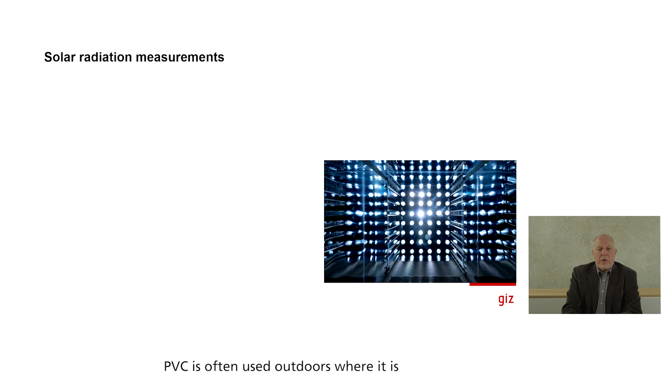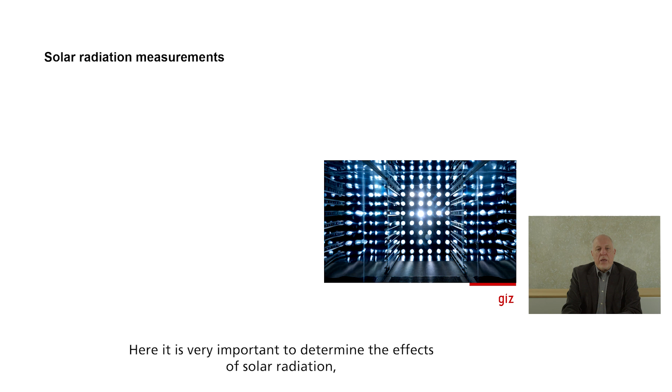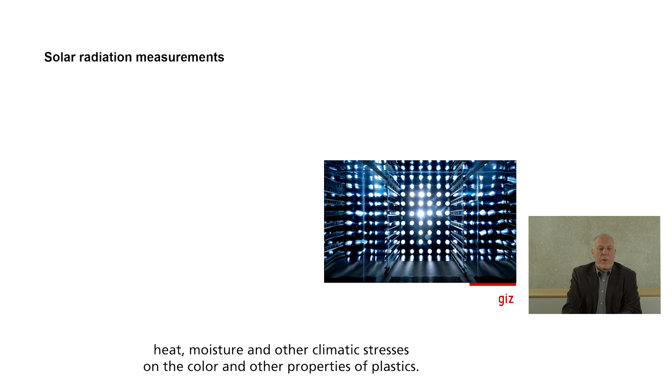PVC is often used outdoors where it is exposed to solar radiation, for example as profiles for windows. Here it is very important to determine the effects of solar radiation, heat, moisture and other climatic stresses on the color and other properties of plastics. In Europe, outdoor exposure to solar radiation is regulated by the standard ISO 877.

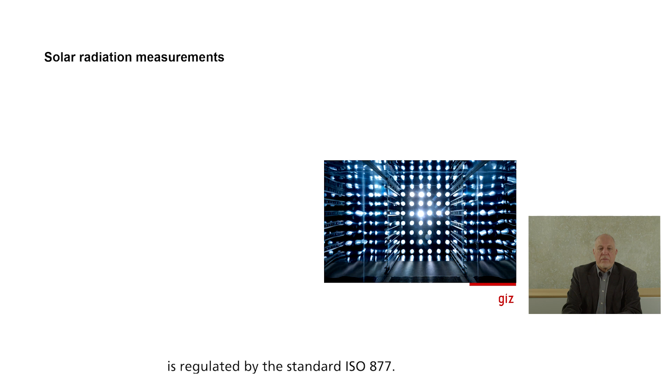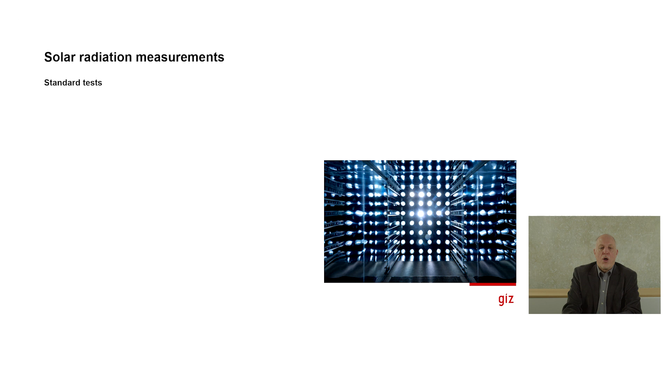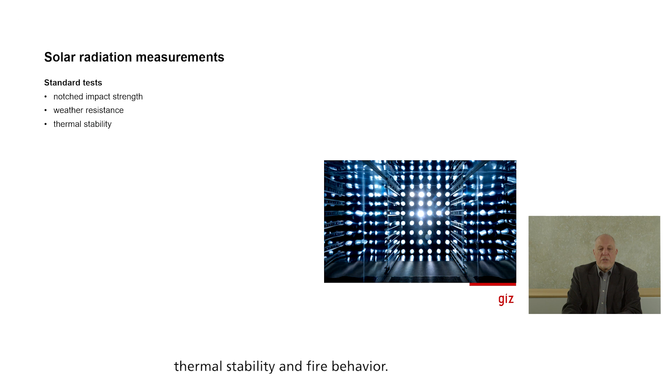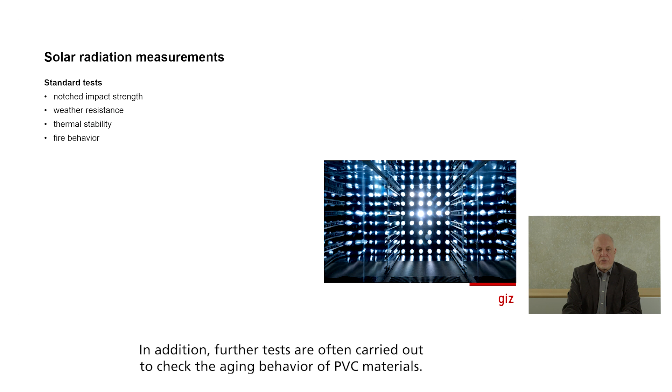Typically, the following tests have to be performed to assess the durability of PVC parts: notched impact strength, weather fastness and weather resistance, thermal stability and fire behavior. In addition, further tests are often carried out to check the aging behavior of PVC materials, and here two methods are usually used.

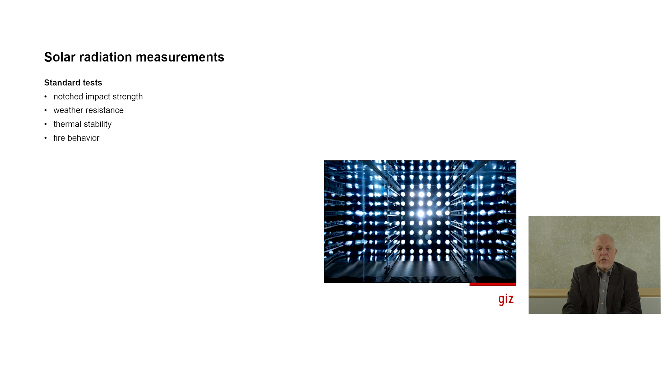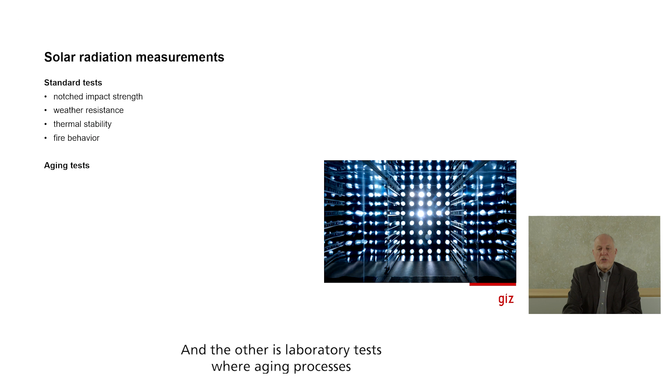One method is outdoor tests in which the materials are exposed to actual weathering, and the other is laboratory tests where aging processes can be artificially accelerated. We will now discuss these two options in more detail.

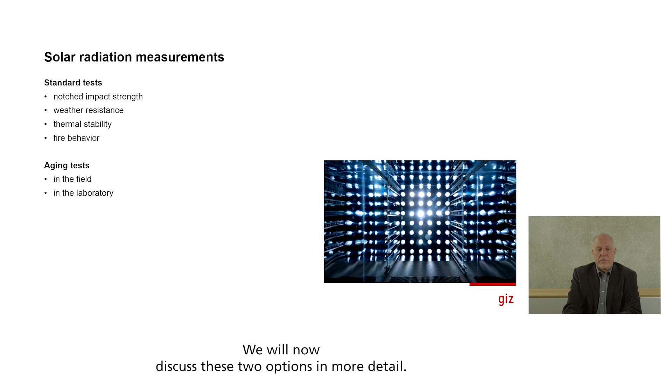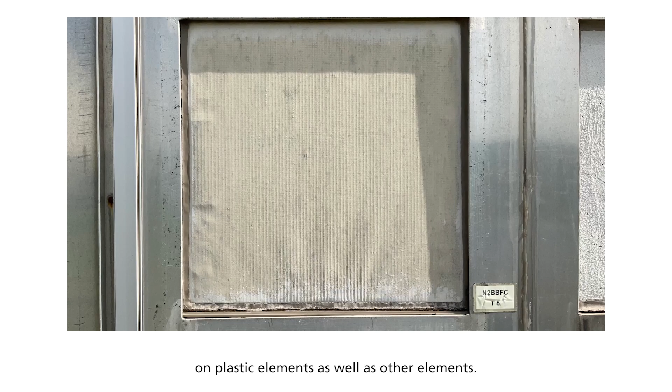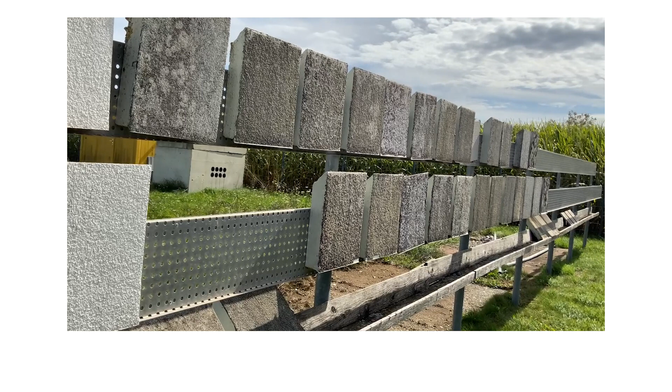Here you can see how we carry out tests in our free field test site on multiple facade elements, for example on plastic elements as well as other elements. The samples are usually exposed to the weather for several years. This is particularly demanding for materials at the Institute's location in southern Germany.

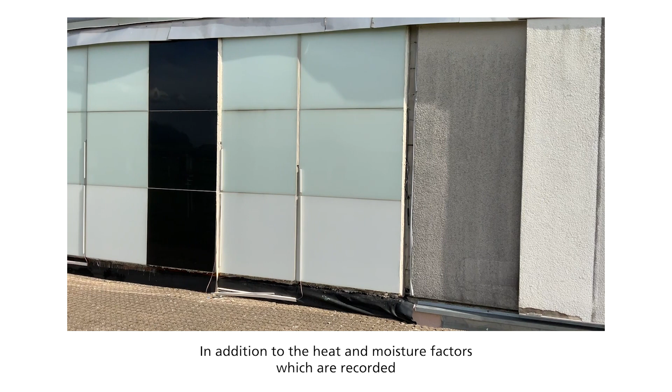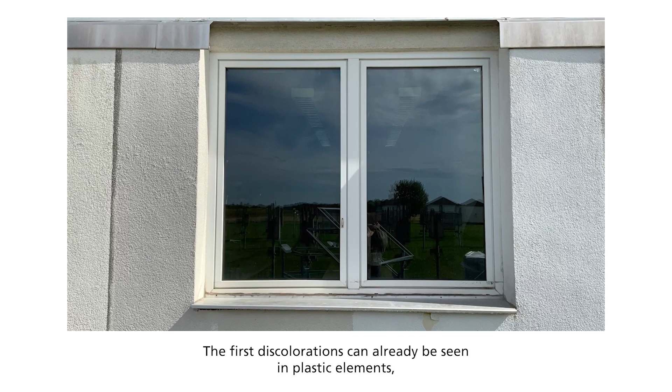In addition to the heat and moisture factors, which are recorded across the cross-section of the component, the visual material changes are also examined. The first discolorations can already be seen in plastic elements, and these are expected to intensify over the next few years.

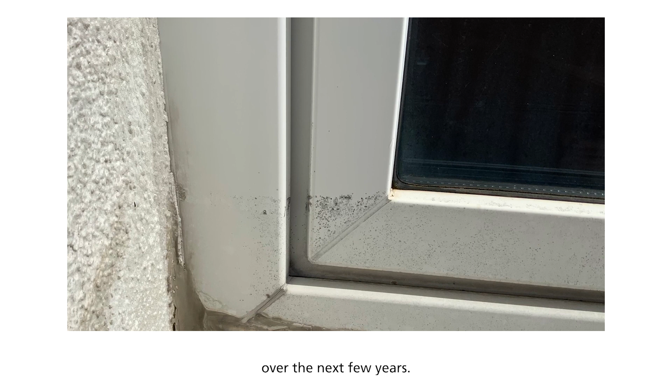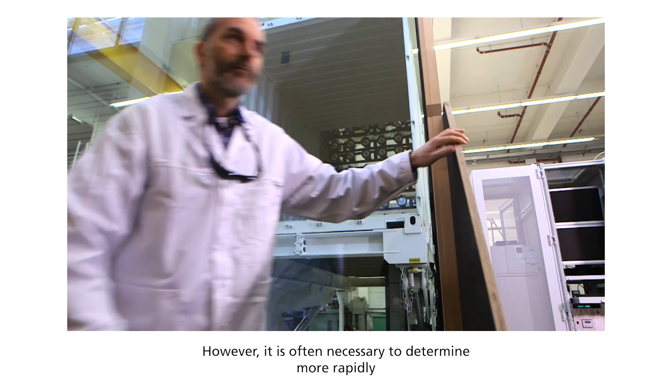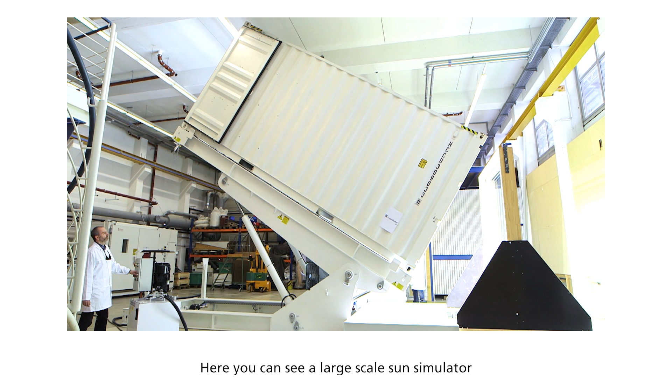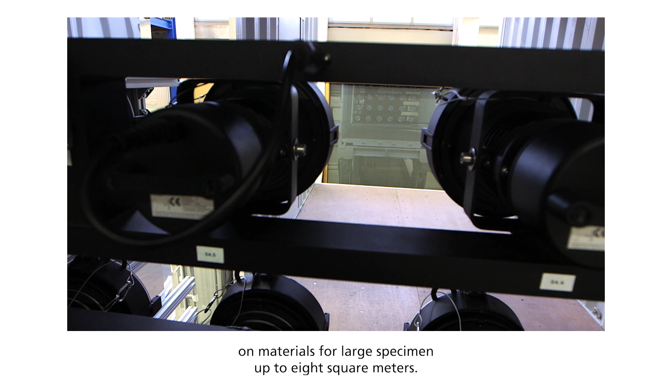However, it is often necessary to determine more rapidly the effects of radiation, heat and moisture on the physical, chemical and optical properties of plastics with artificial accelerated weathering or artificially accelerated irradiation exposures that use specific laboratory light sources. Here you can see a large-scale sun simulator that we use in our institute to evaluate the effect of solar radiation on materials for large specimens up to 8 square meters.

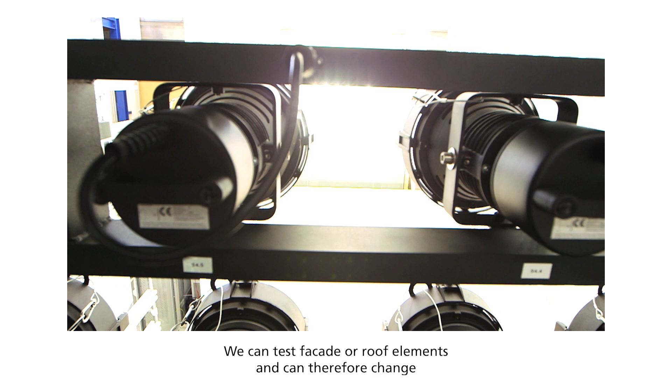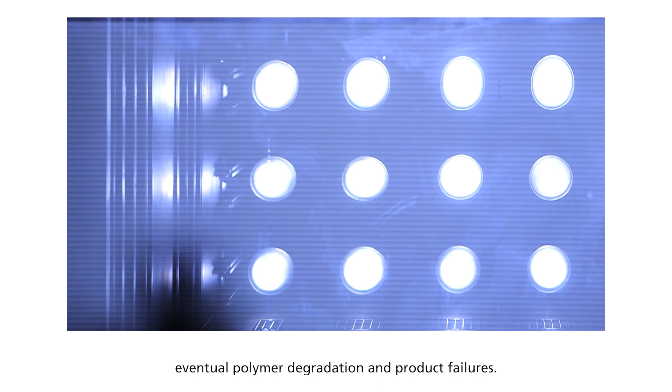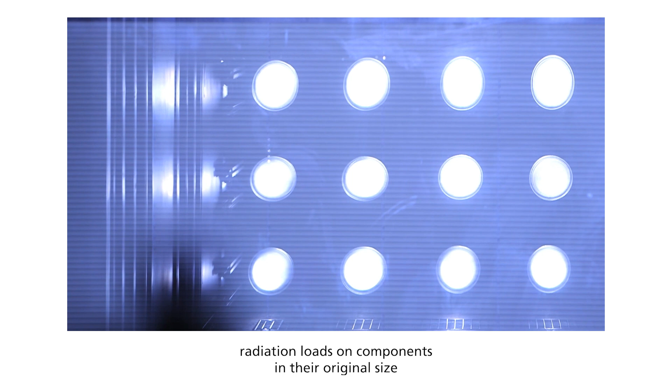We can test facade or roof elements and can therefore change the angle of the sun simulator from 0 to 90 degrees. Exposures in laboratories with devices like this are conducted under more controlled conditions than found in natural environments and are intended to accelerate eventual polymer degradation and product failures. It enables the reproduction of almost all occurring radiation loads on components in their original size and installation position.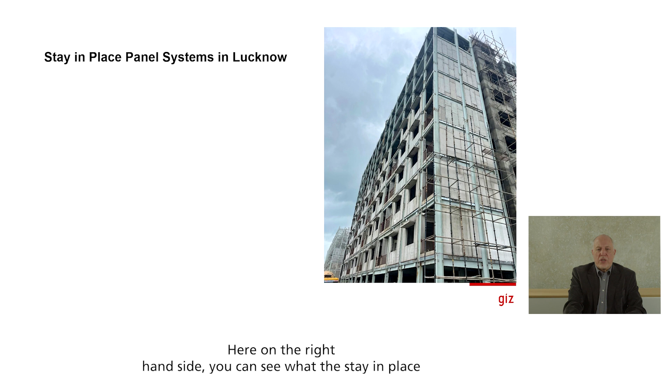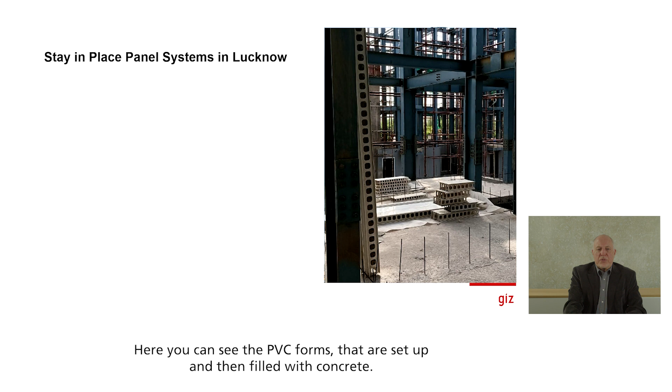Let's now move to our lighthouse project in Lucknow. Here on the right hand side you can see what the stay-in-place formwork system looks like, which is used in Lucknow. Here you can see the PVC forms that are set up and then filled with concrete. What conditions does the structure have to withstand permanently?

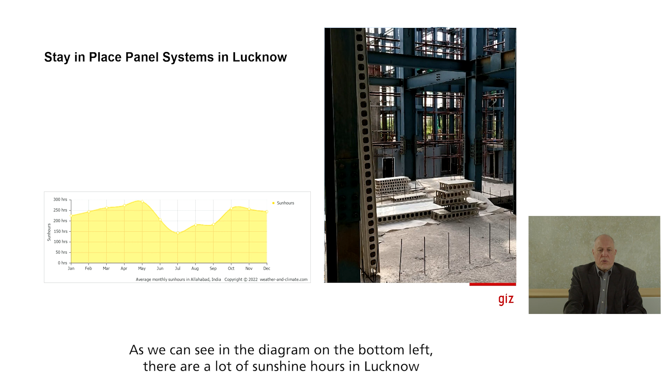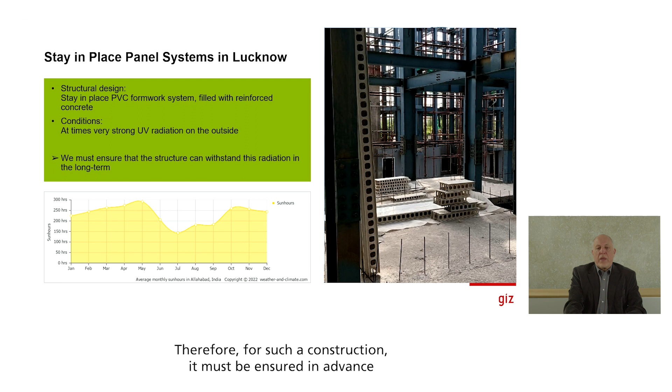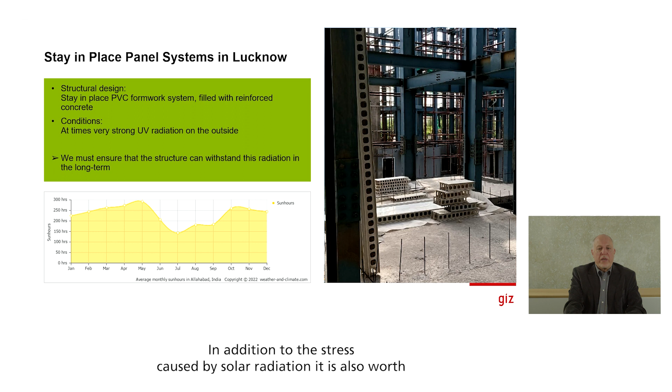As we can see in the diagram on the bottom left, there are a lot of sunshine hours in Lucknow and the UV radiation is very high throughout the year, stressing the material. Therefore, for such a construction, it must be ensured in advance that the material can handle the stress permanently. In addition to the stress caused by solar radiation, it is also worth taking a closer look at the moisture processes that take place in this construction.

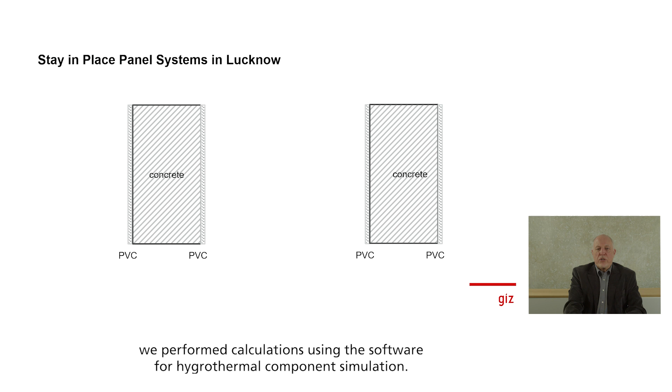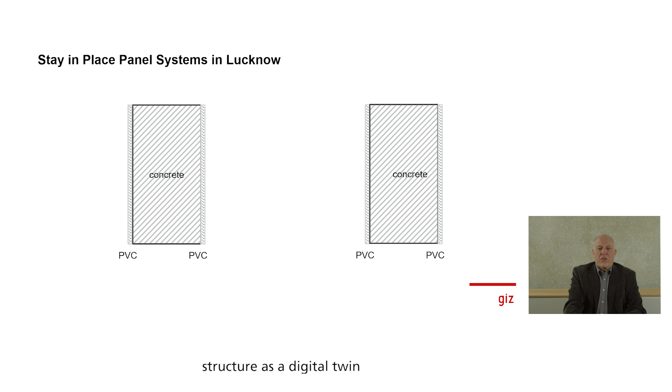For this purpose, we performed calculations using software for hygrothermal component simulation. We specifically mapped the construction structure as a digital twin, as it is currently executed in Lucknow, and used realistic climatic conditions as framework conditions.

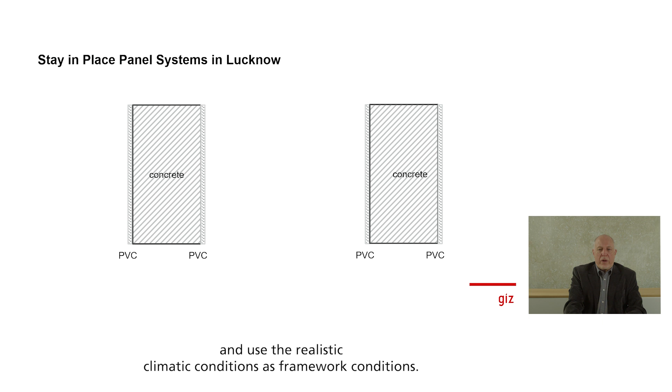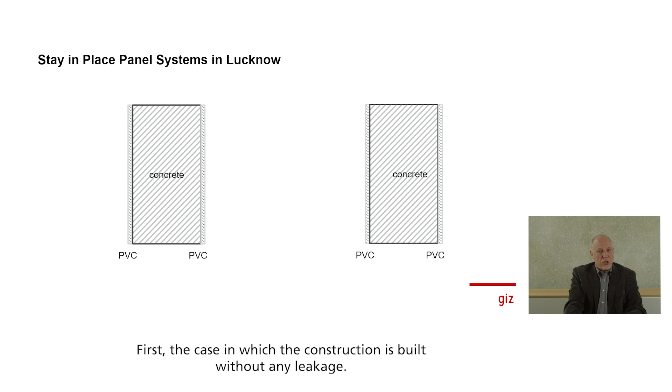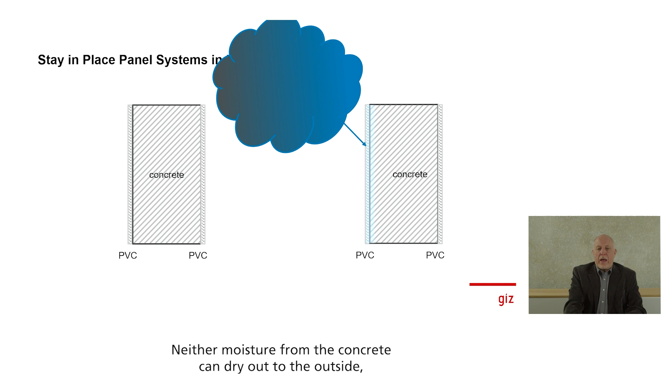We calculated two different variants. First, the case in which the construction is built without any leakage, meaning the PVC layer is completely impermeable to water. Neither moisture from the concrete can dry out to the outside, nor can water from precipitation get into the construction.

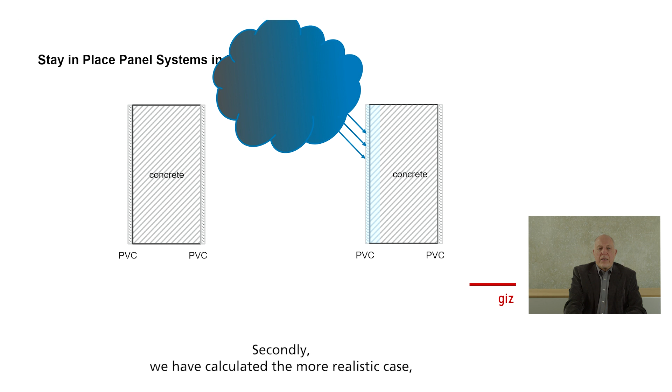Secondly, we calculated the more realistic case: a construction with the same structure, but where the PVC layer has some leakages through which moisture exchange can take place.

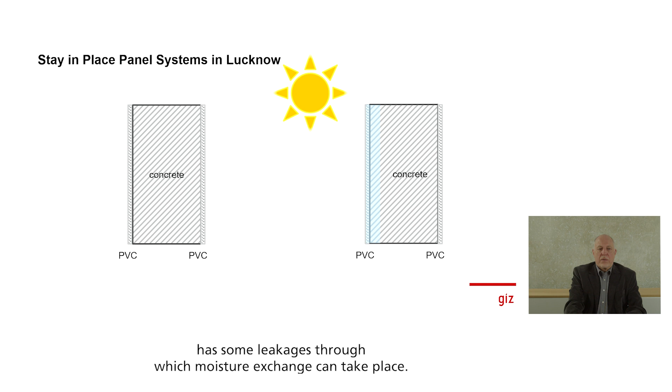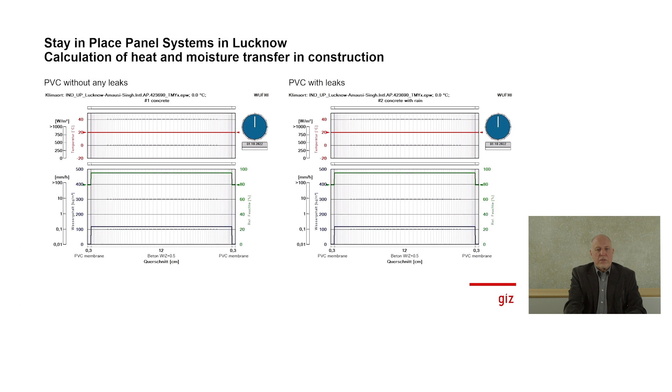Now let's take a look at the results of our calculation together. We calculated for both versions how the heat and moisture in the construction will behave over the next 40 years. On the left-hand side you see the version without leaks, on the right with leaks.

If we start the animation now, we can see how the heat and moisture behave over the 40 years. On the left we have the exterior of the construction with the PVC layer on the outside. In the middle, our 12 centimeter thick concrete layer, and then inside again a PVC layer. On top we get the temperature over the construction, which we won't look at closely for now.

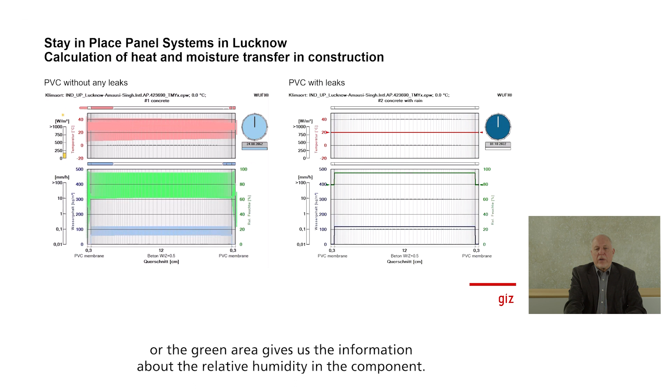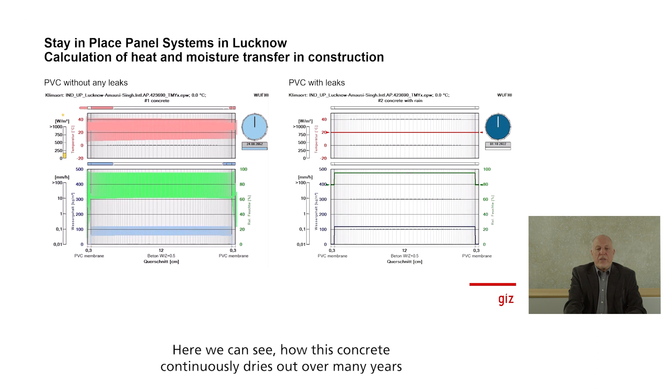We focus on the moisture profile in the component structure, as seen below. The green line, or green area, gives us the relative humidity in the component. When concrete is placed it's naturally very wet. Here we can see how this concrete continuously dries out over many years, until eventually an equilibrium is reached at something above 60%.

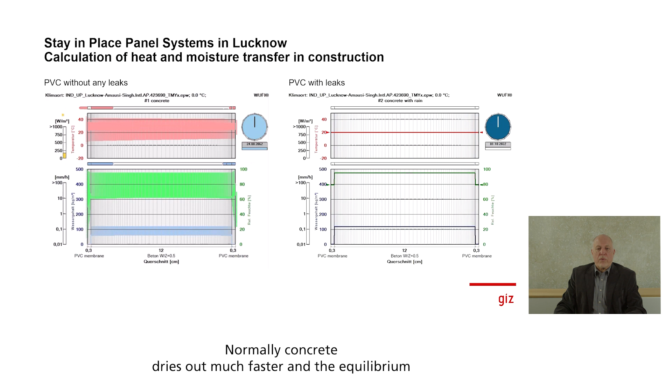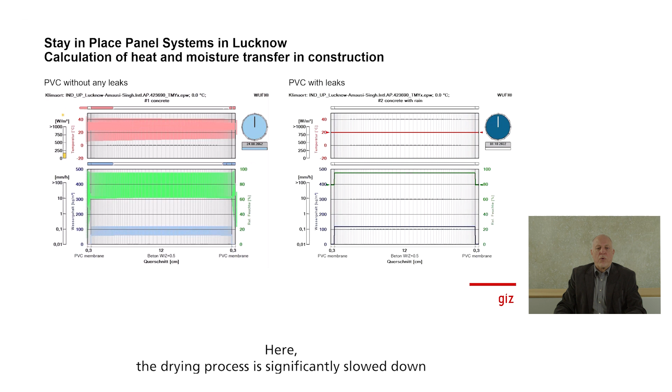The blue line gives us the absolute water content, which decreases according to the relative humidity. Normally, concrete dries out much faster, and the equilibrium moisture content is reached after about 5 to 10 years. Here the drying process is significantly slowed down by the dense PVC layer.

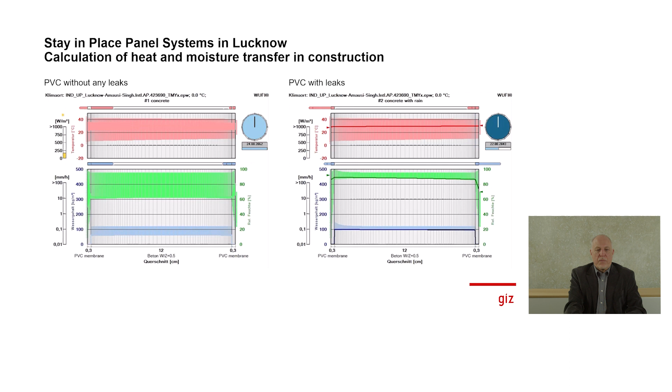Let's look at the construction again, but now assume some leaks in the PVC, so that on one hand rain can penetrate, and at the same time moisture can dry out from the concrete.

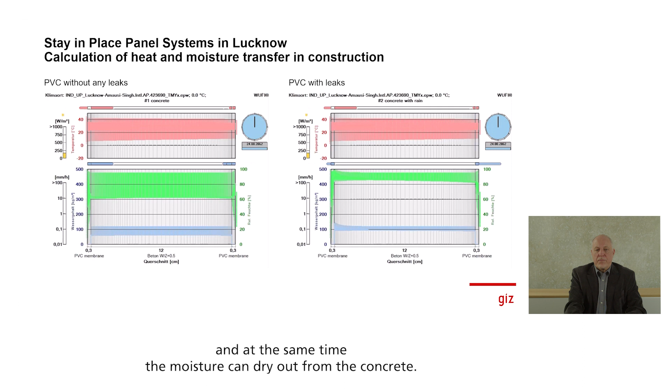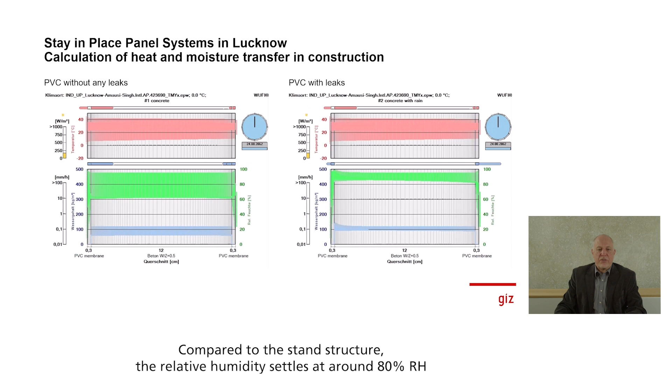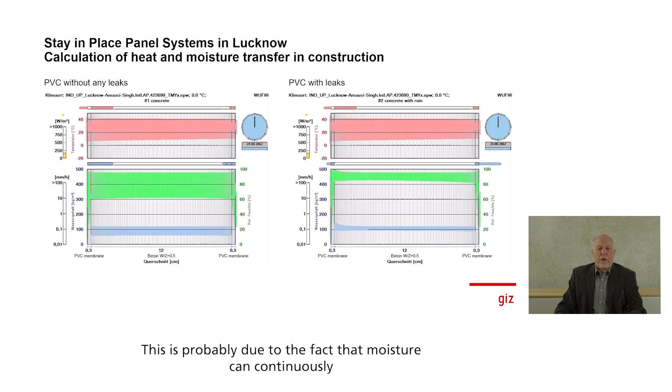We focus again on the moisture conditions at the bottom right. Compared to the dense structure, the relative humidity settles at around 80% RH, and the absolute water content also remains relatively high over the long term. This is probably due to the fact that moisture can continuously penetrate the structure from the outside.

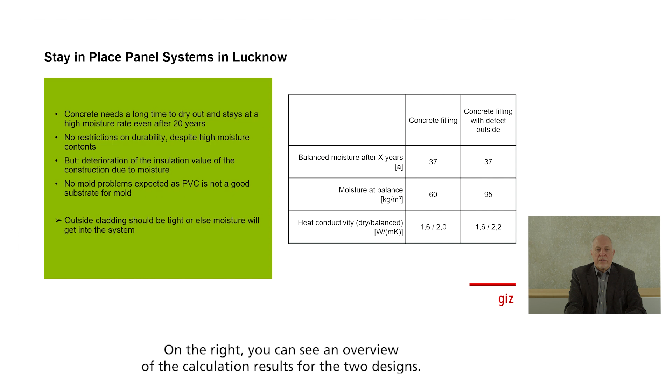What conclusions can we now draw from the calculations? On the right you can see an overview of the calculation results for the two designs. For both variants, it takes about 37 years for the moisture content in the component to level out evenly.

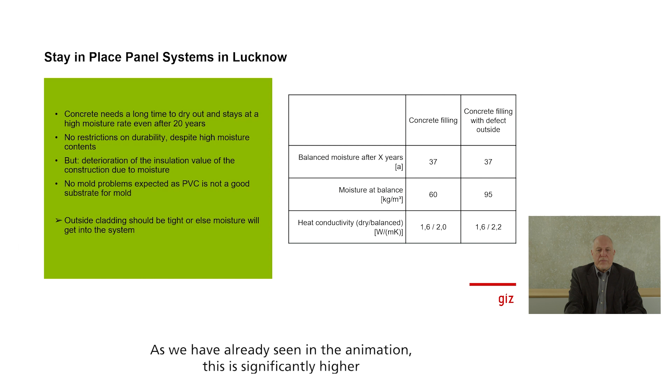Below, we see the moisture content that has settled after these 37 years. As we already saw in the animation, this is significantly higher in the leaky variant, at around 95 kilograms per cubic meter.

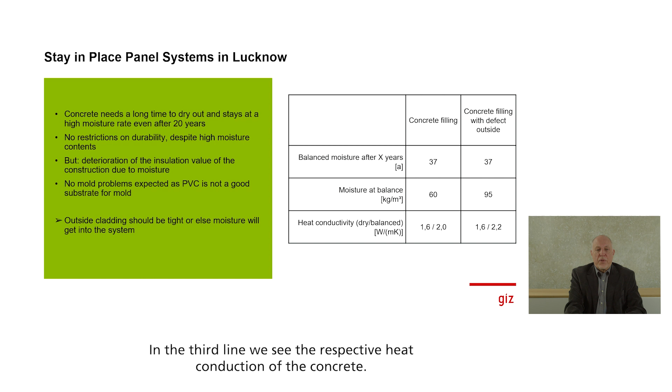In the third line we see the respective heat conduction of the concrete: first the value when fully dried, then the value that results depending on the actual moisture in the component. This is clearly worse, especially in the second variant, where the moisture content is permanently higher due to the leaks.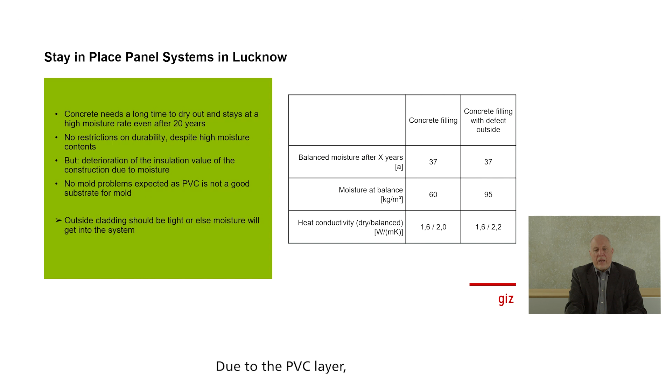Due to the PVC layer, even if a substantial amount of permanent moisture stays in the material, there will be no moisture issues, as concrete is very insensitive to moisture.

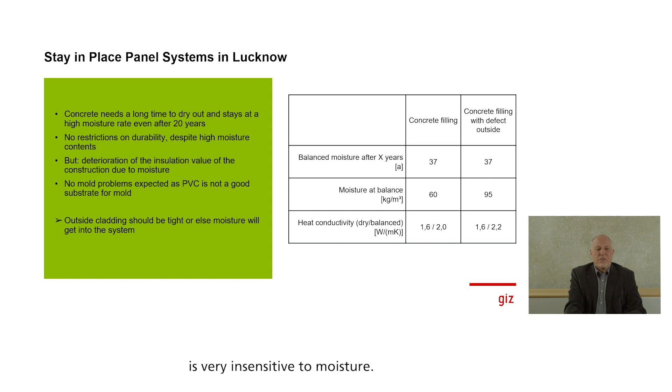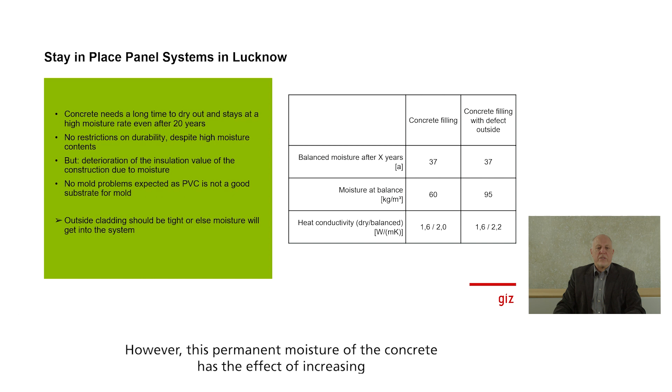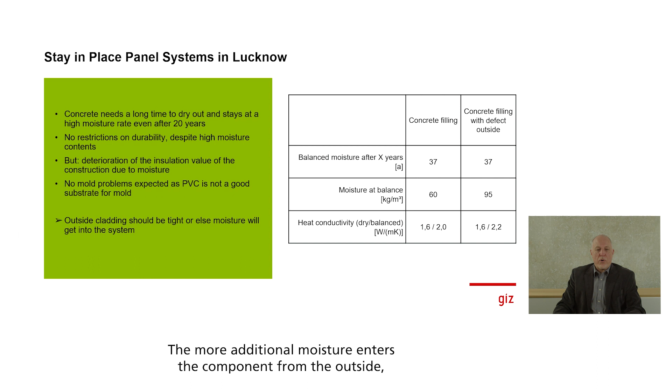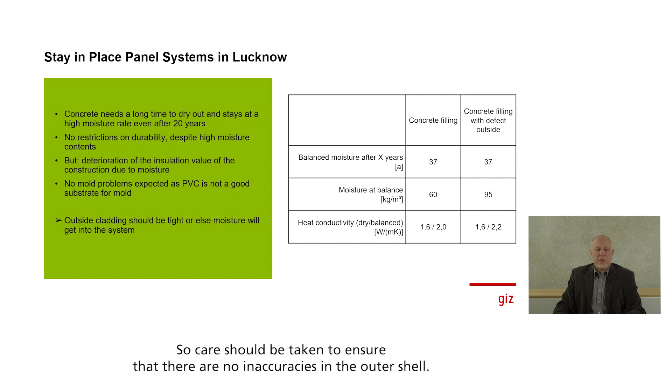However, this permanent moisture in the concrete increases its thermal conductivity and thus reduces the insulation value, as we see in row 3 of the table. The more additional moisture enters the component from the outside, the poorer the insulation value. So care should be taken to ensure there are no inaccuracies in the outer shell.